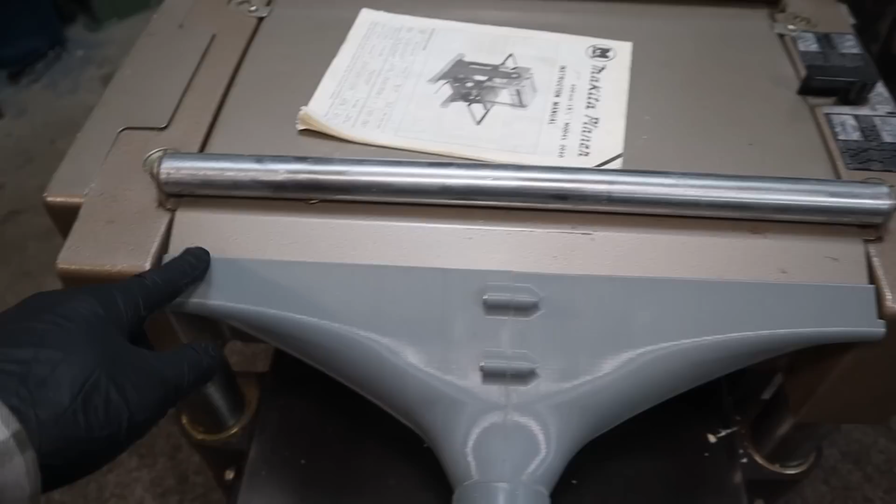So this is my planer and I really like this planer. It does not come standard with some sort of way of collecting the dust. So this would have just shot all of the sawdust all over the floor. And I guess maybe for some shops, like maybe if it's in a barn, that's okay, but definitely not for my shop. So a few years ago, I 3D scanned the back of this planer and I came up with this 3D printed dust collection system.

And it works okay. My shop vac hose just attaches to here. And the smaller shop vac hose can also attach just on the inside. So there are a few issues with this. Number one, it doesn't look very good. Doesn't look like it was professionally designed. And it doesn't look like it belongs to this machine. So I'd like to address that.

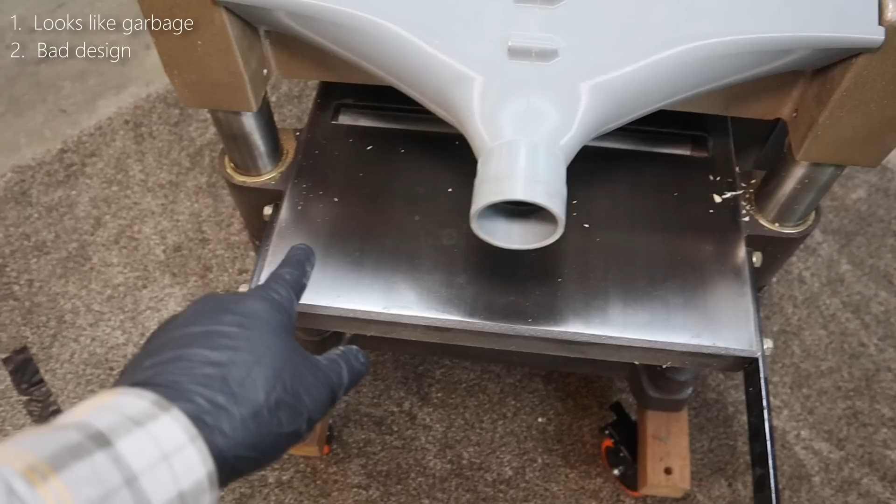Number two, this comes out the center and the hose droops down, which means I don't tend to use the center of the planer. I have to go to each side. And number three, when I plane material on each side, the collection is horrific at the sides. It just does not collect any sawdust and it all gets bunched up in here. Number four, these gaps are a little bit too large, so some sawdust spits out the side as well.

And number five, this was printed in two pieces. I would really prefer it to be printed in one if that's possible. Not really sure at this point whether that's going to be. So I thought we would use a combination of old school and new school 3D printing to come up with a brand new version. And as usual, I'll make it available to anybody that has the same planer.

First, I'd like to hook up my shop vac and run it just as is. We'll have a look right through the front and see what's happening with that sawdust inside there.

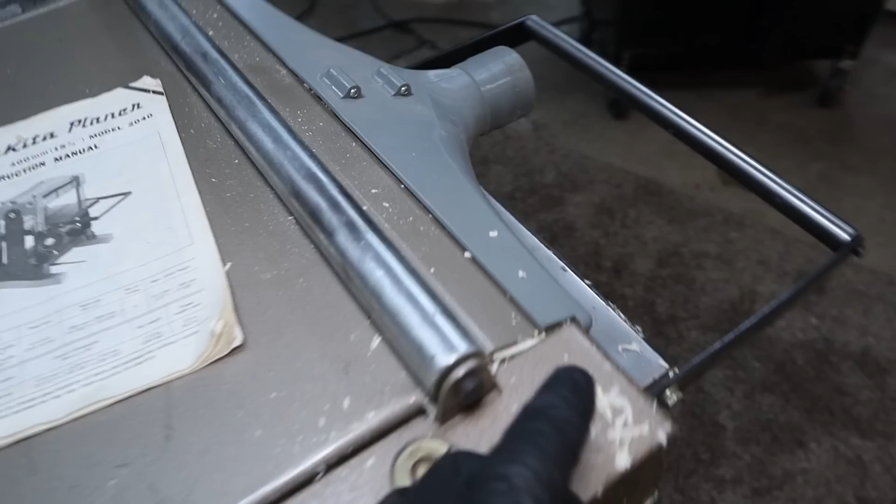So we didn't have many passes there and there's sawdust all over the place. Sawdust on the tripod, sawdust on the floor, off to the side. It was shooting out here a little bit, not too bad out of here. A little bit coming out of here, a little bit on the sides. So hopefully it's pretty obvious that I need to make some changes to this. So I'm going to get this all cleaned up. We'll get this lid off of here and have a look at how this is attached.

And this has some pretty sticky adhesive on it. I think it was the exterior grade automotive tape. So I'm not sure if the heat gun's going to work with this, but I'm going to give that a try.

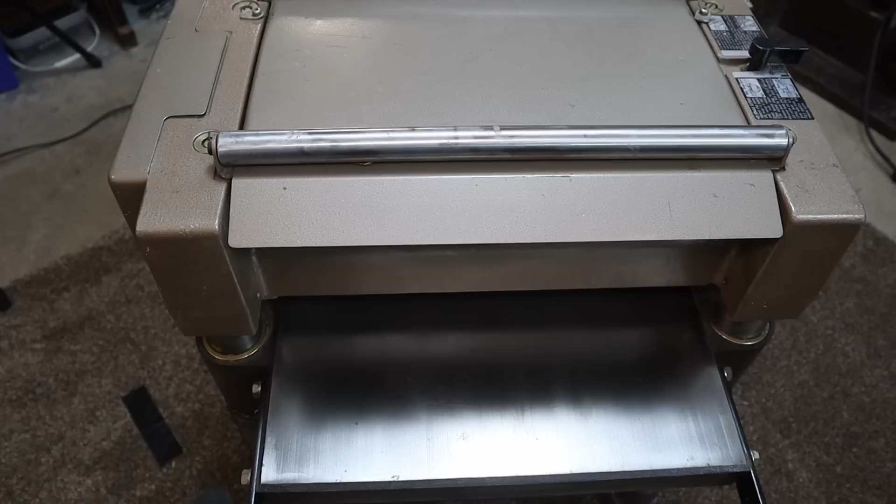So I think the best way to approach this would not be to go directly into the software using a 3D scan, but rather to go old school and create a template on here, something that we can actually use and test out and maybe even modify to see if it's all working properly. We'll shoot the camera in the front there as well with some light, make sure that it is doing exactly what we expect it to do.

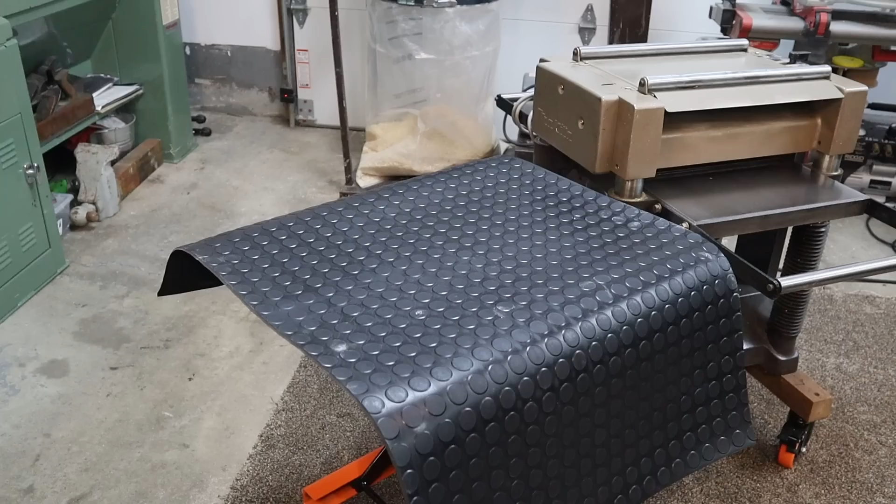So we're going to need a sharp knife, a glue gun, glue sticks, and a cardboard box.

I'm a little bit surprised with this being a popular planer from the past that there aren't any good options for dust collection. There are maybe 3 or 4 options. They are a combination of wood or maybe metal. Some are ductwork. One person even cut a hole in the top panel and put some ductwork coming right out of there. I think that is a big no-no. Hopefully by the end of this video, we'll have a much better option.

So I definitely do not want something coming off the center. Also, something coming up wouldn't work well either, because there's going to be boards on the top of here and those boards would hit that pipe. So really all that we have left to choose from is either this side or that side. And I've got the switch at this side and I've got the hand wheel already, so I think I will just have the pipe over on this side as well.

The pipe is a 5-inch, I think it's inside diameter, not 100% sure yet, I don't have it, but this is 5 3/4. It should give us a little bit of wiggle room to work with.

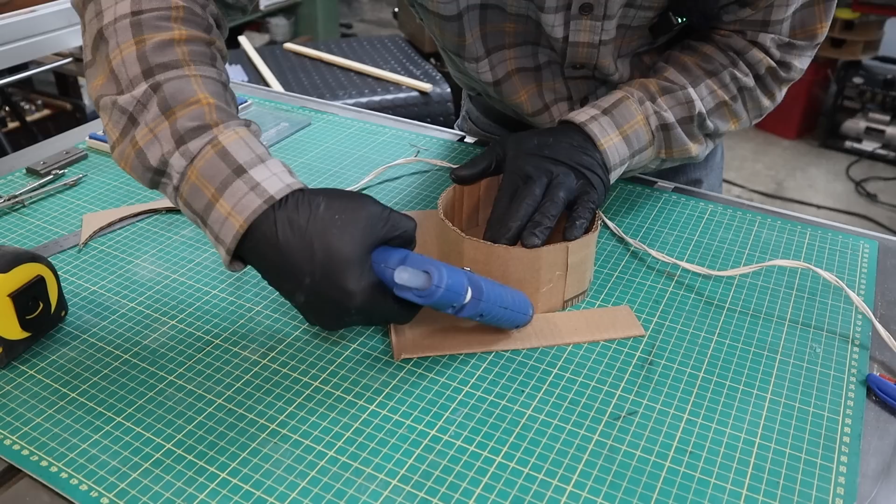It just doesn't look like this is going to work properly, so I went ahead and remade it to this version. Okay, an angle like that, but it's still not right. Remade it again, and it really kicks out further on the bottom here as well. So that's not too bad, and the corrugated pipe that I'm going to attach may end up being around the outside, so I want to be careful with that.

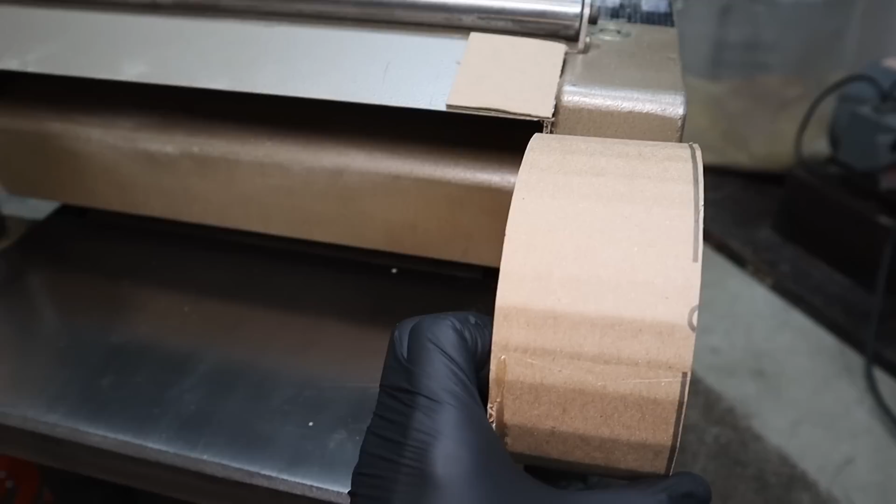So what I think I'm going to do is have the pipe off to the side like that. It will make it a bit longer, but I can break it into pieces if I need to. Now this needs to come off, so I'm going to use the heat gun for that.

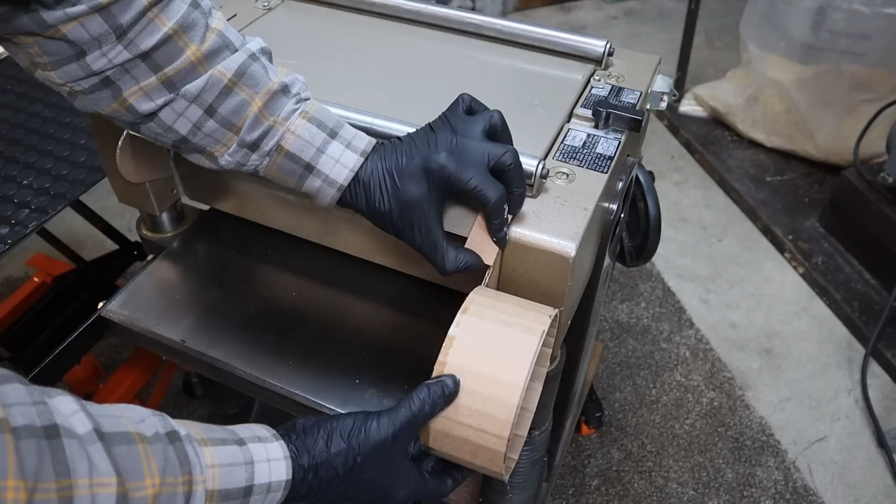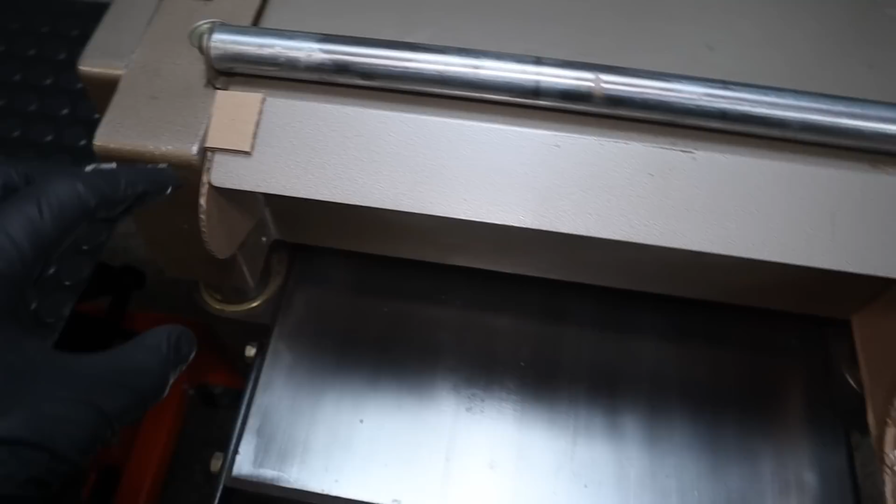I think that's starting to look really good. Now we need to fill in a piece. We need to go from this width to this width.

Got a couple problems. One is the cardboard only wants to bend in one direction. I'm changing shape at different rates and I'm changing angles at different rates, and I just don't think that having a single piece of cardboard is going to work here. If I did, I'd really need to make it much more malleable. So I'm not going to do that.

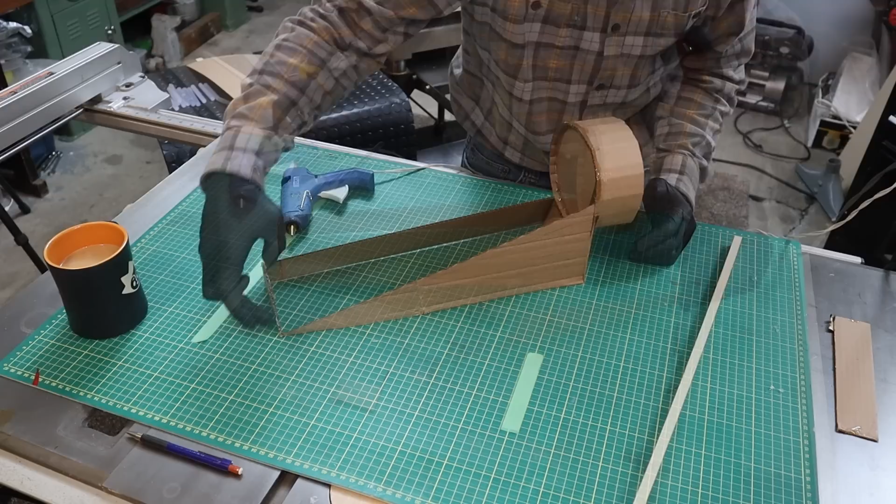Instead, what I'm going to do is anytime that it transitions to a different type of shape, like from a straight line to a curve, I'm going to make a cut. So for example, on this side, I have a curved piece, but over on this side, I have a flat. So I'm going to taper from a triangle that is this wide, where the flat section is, to nothing over on this corner.

I would say it probably took me close to a half an hour just to do the glue up. So maybe an hour overall to come up with this. And I don't know whether it's actually going to work. So let's go ahead and get this on the machine.

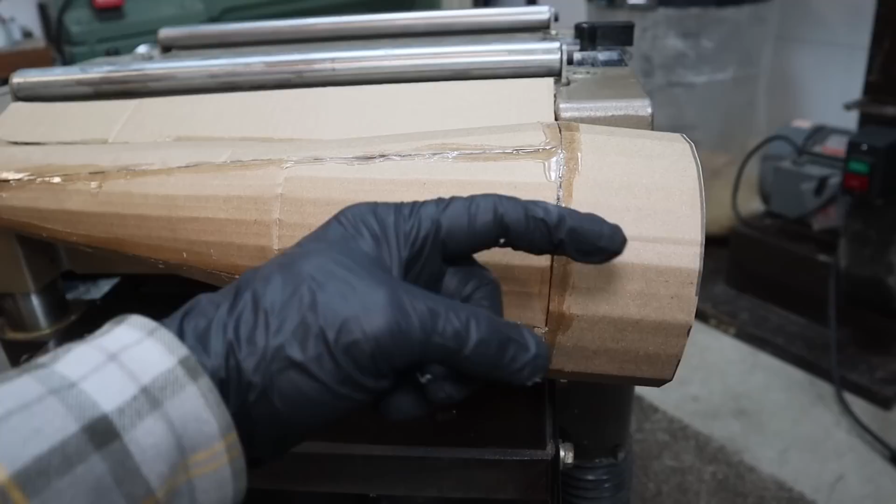Well, I have to say that looks pretty good. You can see this is at a slight angle on the downward, but I don't think that's going to be a problem. You can see there we have a bit of clearance. The pipe should attach outside of there. So even if the pipe does come down, it's not going to impede anything coming through here.

I just noticed right under here, there's a bit of a gap, and I think I'd like that to be filled in. So I'm going to use some cardboard. And this is what it looks like filled.

So the next step is to connect this to my dust collector, and this video was in jeopardy of not making it on time because I got a warning saying the delivery was delayed. Luckily, it arrived. This is the 5" by 10' clear PVC hose. This is supposed to be pretty high quality hose, and it's supposed to be able to fit a 5" outside diameter. So the ID on this should be able to stretch or fit an exact 5". That said, this is probably not going to be the exact right size, but that's okay.

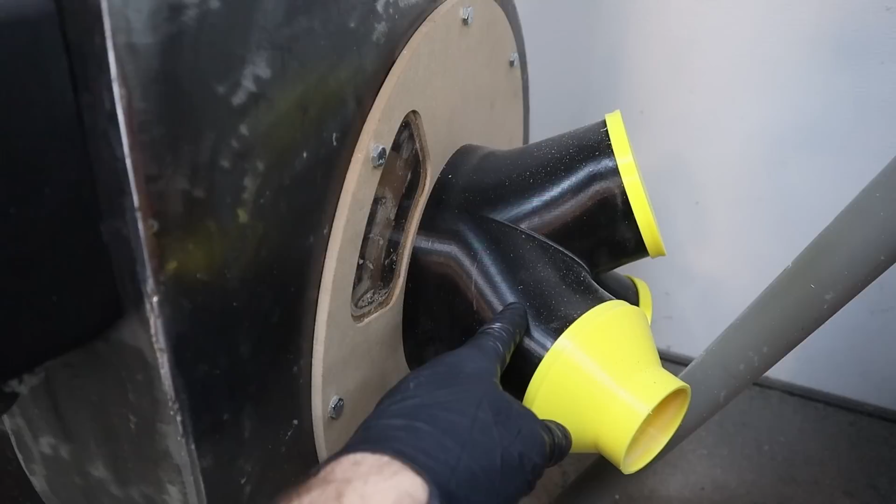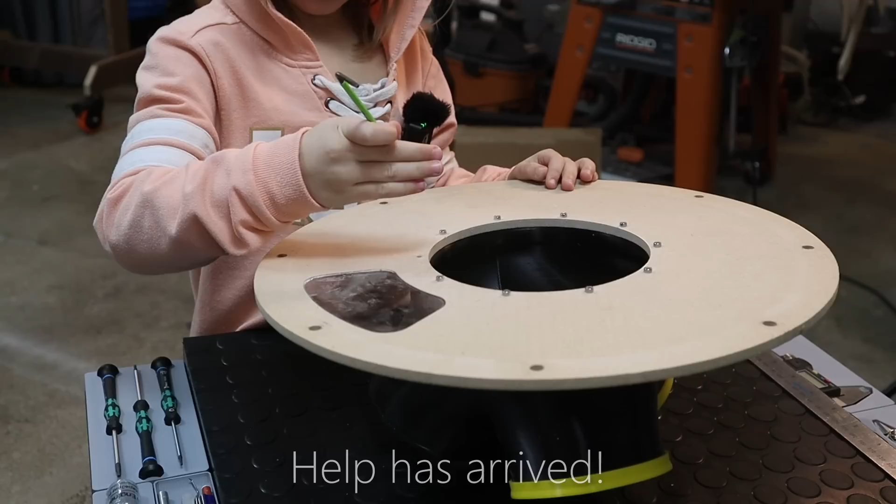Steel to steel, a little over 5". So perfect. So that means that I can remake this for the dust collector with just one piece coming out at 5", and I will have a little bit of a lip on it as well, just like I did with these ones. Here's the new one.

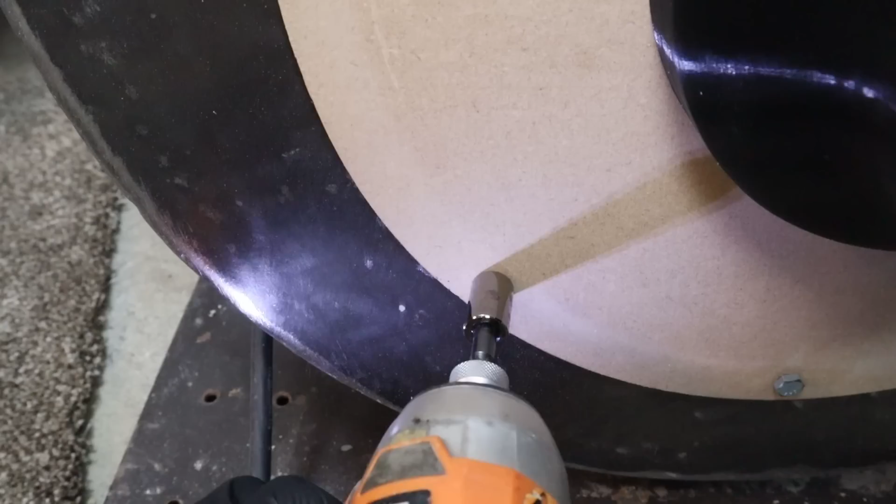So now we have the 5". Before I was using a 4", but it had the splitter on it as well. So let's just do a quick test.

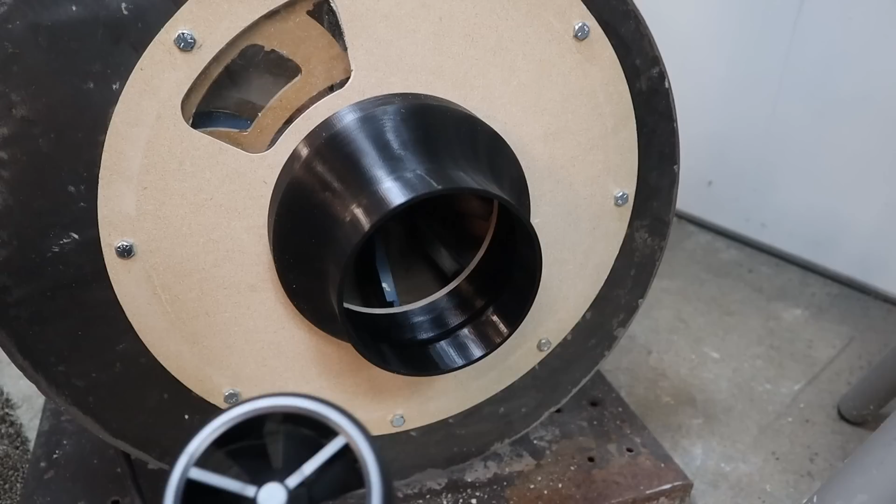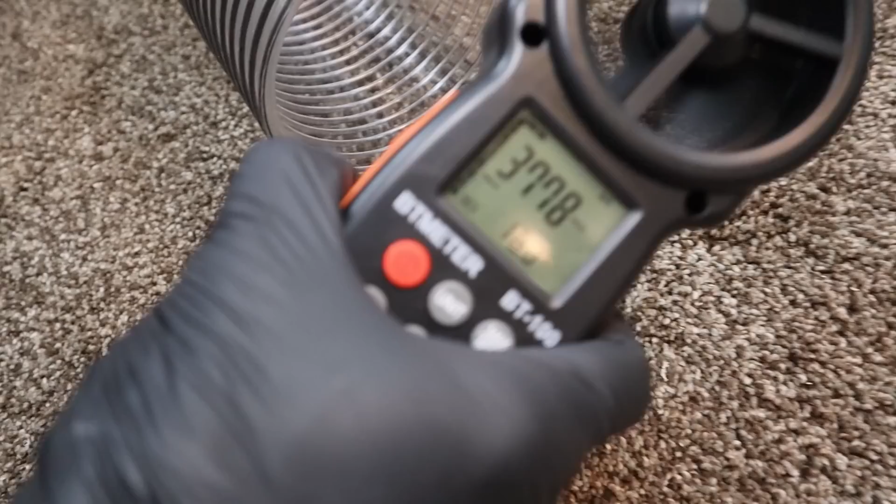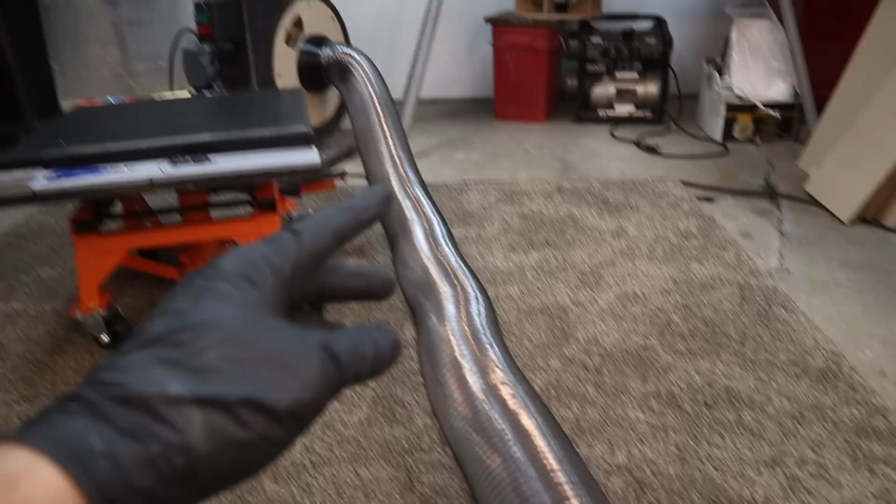So that works out to about 930 CFM, which is dramatically more than what I had before. I think I was getting a little over 400, 450 or so, which I guess makes a bit of sense because the total volume of air that this is able to move is dramatically larger than what you'd have on a 4". Eventually, I'll switch over to smooth pipe and only have a short section of corrugated hose.

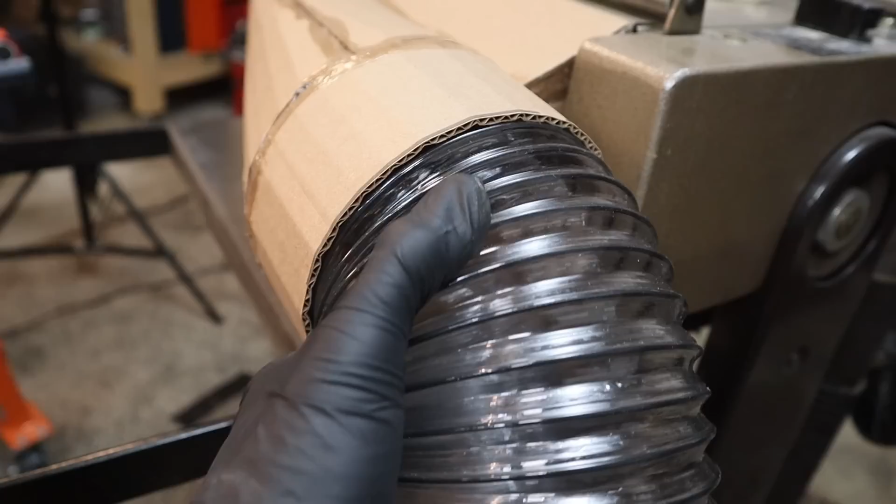This is in there nice. It is putting a little bit of downward pressure and trying to pull up on this side. So there definitely needs to be something to prevent this from lifting on this side.

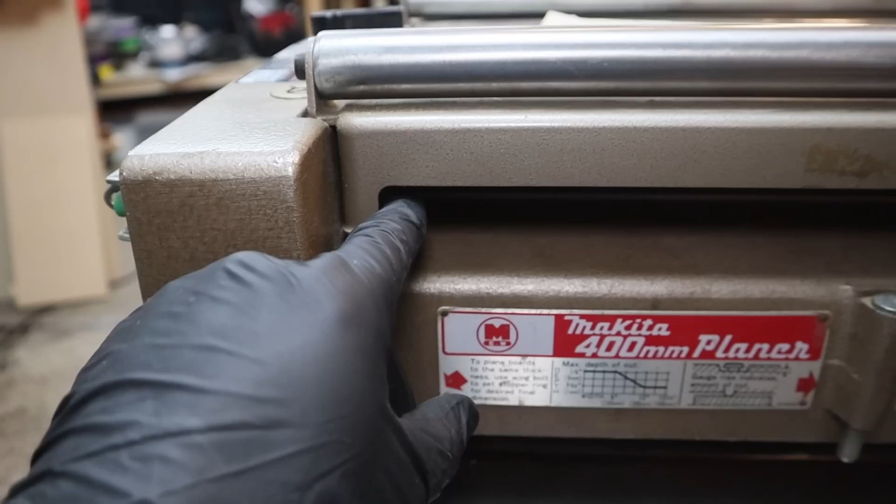So I took the glove off because I was able to feel there's quite a bit of air movement here and a little bit of air movement down here as well. There's a big cutout here, and I'm not really sure why that is exactly. It may be to allow the air to be drawn in so that the majority of the chips come out the back.

But with us having a dust collection, I think it makes more sense to close some of this off. And I've made a filler piece just out of cardboard for now. We can eventually make this out of some other material. And I think that's going to help to increase the airspeed here and also promote a little bit more draw from the bottom.

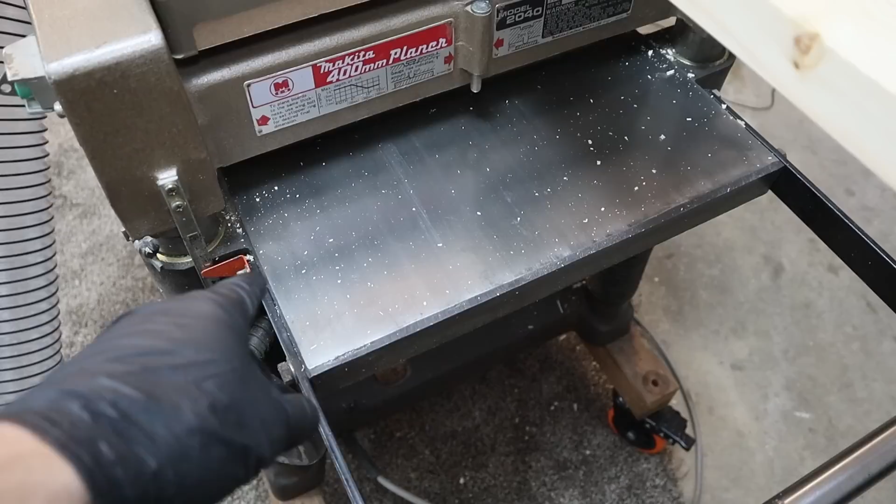One chip over out the back, one chip on the floor, on the back. Front's a bit different story. There is a little bit here, there's a little bit on the floor. What I found was that towards this side is where we had the majority of the problems. And I think there's not enough air movement over on this side. So this is where I want to make a slight little change. I'm going to close this off a little bit more as well.

I blocked this with a little bit of duct tape, and I'd like to run some parts through and see if we can see what's happening inside.

Well, that was definitely a lot better than before, and the dust collector's just eating the sawdust for breakfast. The hose size seems perfect. I don't think there's any chance that that's going to get clogged up, but I was kind of hoping for a little bit better dust collection, to be honest with you. So I think I'd like to take a different approach.

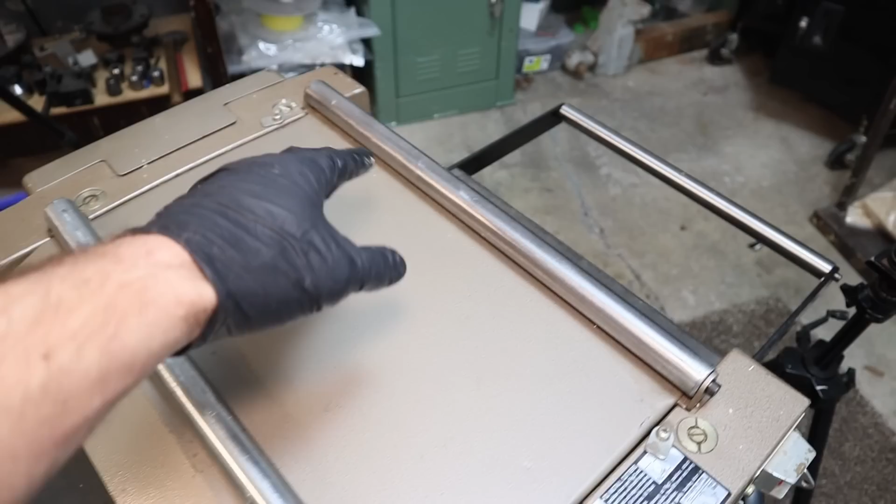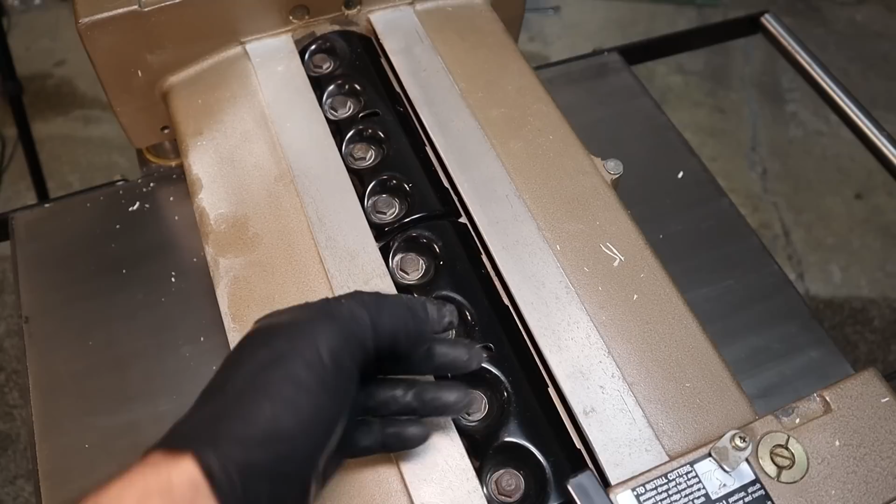I'd like to take the top of this off and see if we can do something right at the source rather than trying to capture it all at the back and trying to plug holes and increase airspeed and things like that. I think we can maybe do one better. It's strange that so much air is coming in or being pulled in from here when it really should be pulled up from here, and there's quite a gap. So I think that we can do a much better job of pulling air in from here where the cutter head is.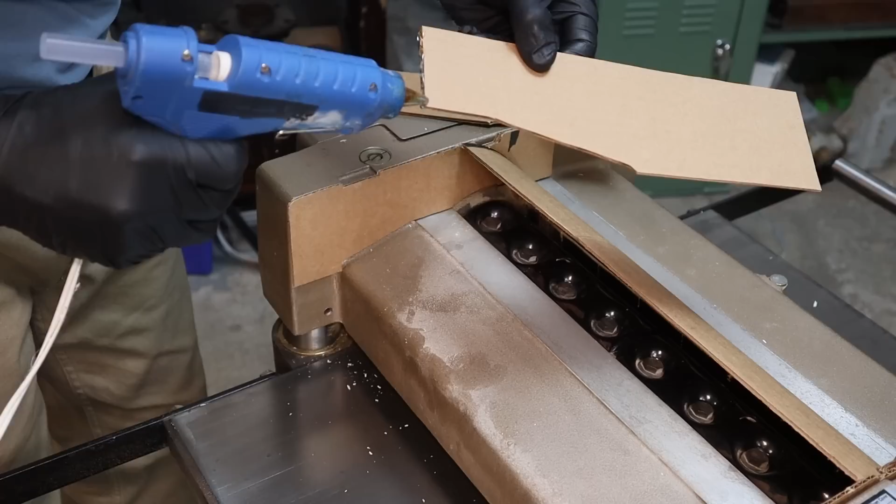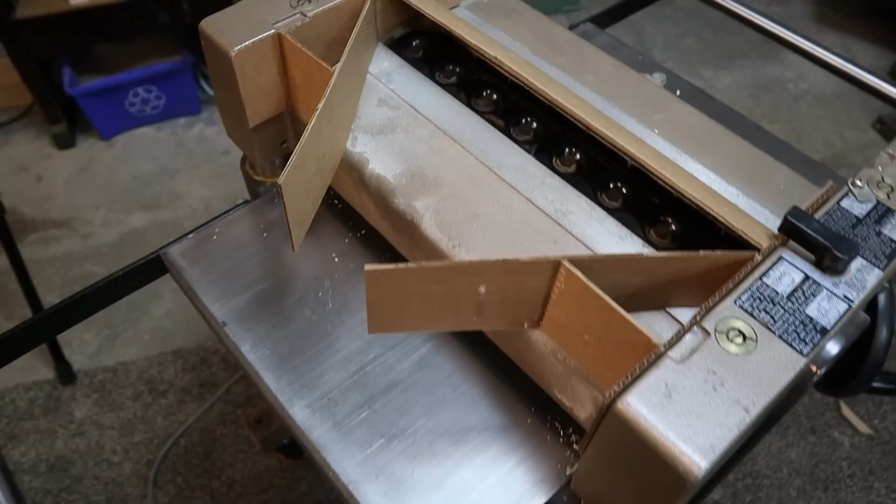I'm at a bit of a crossroads. I have to make a decision about where I want this to come off. Do I want it to come off the back, which is against what I was originally wanting to do, and have the hose dangling down, or find some way of supporting it just at the right height, or again off the side? And after thinking about it for a few minutes, actually more than a few minutes, I think I'm going to continue to come off the side.

And I didn't go too crazy with the design. I just wanted to keep simple shapes. So this is basically a cylinder attached to a bunch of pieces I just filled in. Now, this will not be able to accept the top. It has these gussets in here, and I didn't want to have to account for them because it just added some complexity. And it has this piece, a deflector on the back, and that kind of got in the way. I'm not quite sure what I want to do with that yet.

So I have a piece of MDF here that covers up that section, and I can fasten it down with the original screws. And this time, rather than the larger cylinder, I've gone with a little bit smaller one, and instead the hose will fit over top of it like you'd typically see.

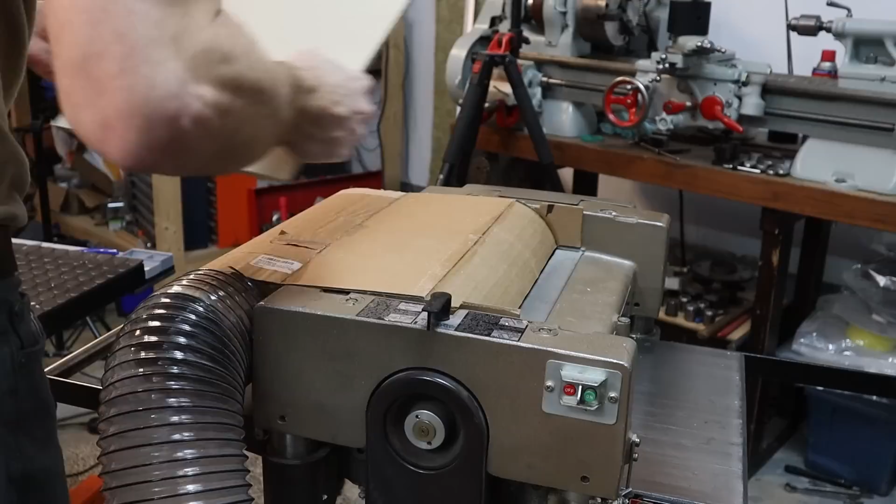So I'm pretty confident that this one is going to work better, but let's go ahead and set that one back up first, and I'm going to run some pieces through on this side right here where it was having the most trouble, and then we'll set this one up and do the same.

So only a few passes and we have sawdust here, and a bit on the floor as well. So hopefully with the change it does improve this. So let's take a look.

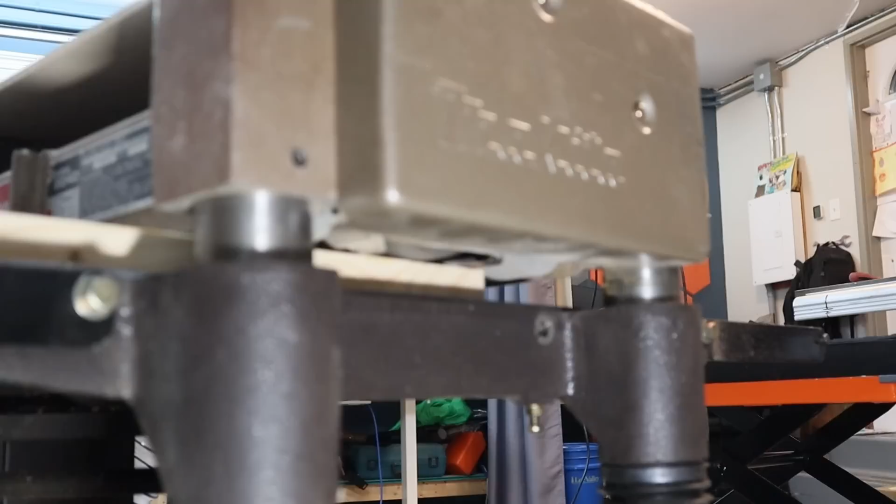Well, it's not perfect, but it is quite a bit better than what I had before. And I was running right at the very edge. I ran a few just right here.

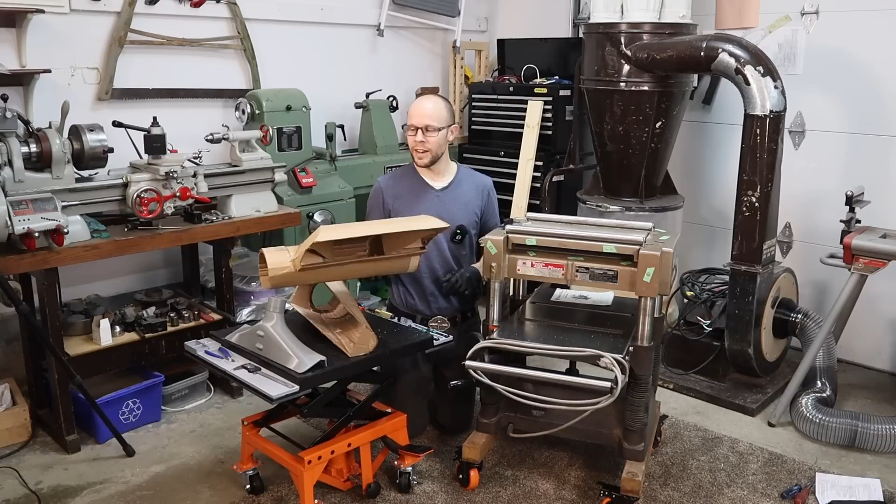Now I probably could leave this as it is and paint it or even fiberglass with epoxy, and this would last me a long time, but I would like to level this up, and I'd also like to make something available for any of you who have the same planer and have the same problem as well. So let me show you what I've done.

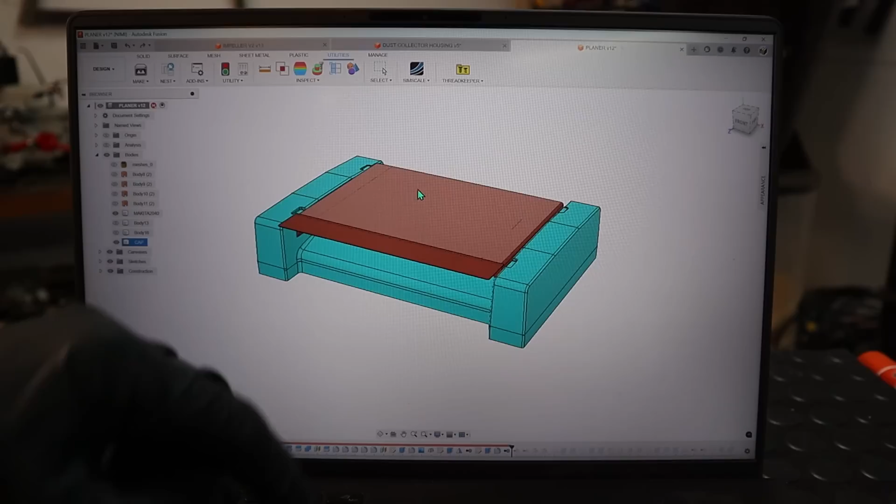Inside Fusion 360, I've created a very basic model from a 3D scan, and I've also created the top cap as well, just to make sure that I have the right clearances so that this thing does fit in properly, because this is going to be pretty big and I don't want to have any issues. From there, I've created this shape, which is exactly what we did with the cardboard version, but it has a little bit more gradual curve inside of there. It's going to help to funnel some of that sawdust out and into the dust collector.

I was able to find the exact font and create the Makita logo on the back there as well, which I think looks pretty cool. But we're running into a problem here. This thing is just massive, and I'm going to need to split it into several parts.

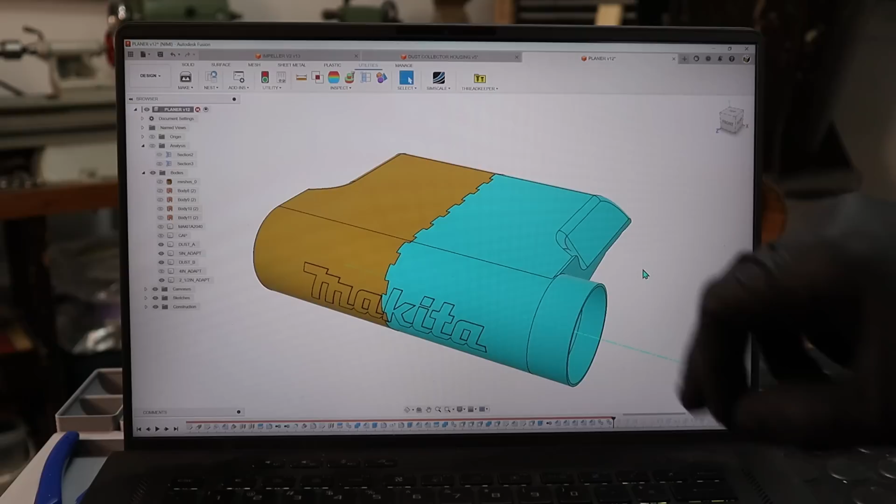So what I've done now is separate it into 3 pieces, and the cool thing about this is that I have different sizes available. So if anybody wants to download this and try and print it themselves, they can download the adapter size that works for their dust collection system. I have the 5-inch, I have a 4-inch, and I also have a 2.5-inch shop vac adapter.

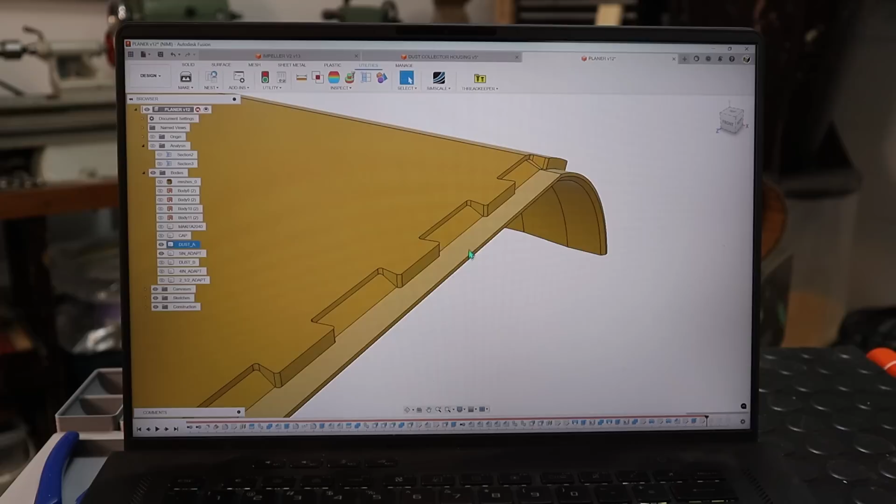So the really difficult thing about this design is how do we connect these 2 pieces together and have it be a very strong connection, but without impeding the airflow on the inside. I have a combination of a dovetail and a scarf joint, and I also have a lap joint in one. So this is intended on being a glued connection, but it should come together and actually be pretty strong without glue as well.

The dovetails are also slightly tapered. As it gets closer to the final meshing point, it gets a little bit tighter and tighter. And to make sure there aren't any issues with this coming together, I've allowed a little bit of clearance in here as well. And the adapters connect to the main body of the dust collector with a slight taper also.

This is going to be a pretty large print, so I've printed these samples to make sure it's all going to fit together properly. This is just in matte PLA, printed on the Qidi Plus 4. And when I brought this together, you can see it's a little bit too sloppy. This is a 0.4 millimeter gap, and it's just a little bit too much.

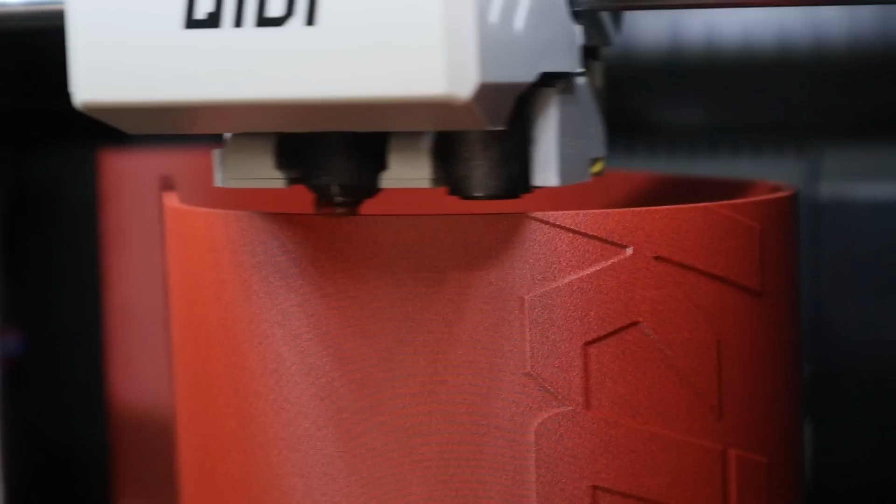So I've gone ahead and reprinted this with a 0.1 millimeter gap, and that ends up giving us this. So the last change was to shrink it down to 0.08 millimeters for the gap, and that should give us a much tighter connection. And that leads us to this.

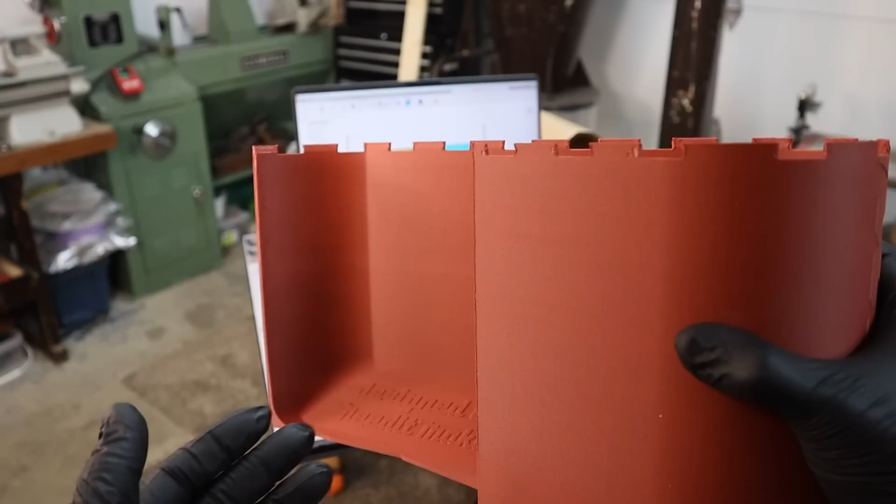This is printed in PETG carbon fiber. There's a couple imperfections in here, but that's going to happen because this print is nearly 100% solid, and it's very difficult to prevent this from warping. I would say the PETG carbon fiber overall did well, but it didn't do as well up in this dovetail area. You can see some imperfections there.

This is the adapter, and this fits on just like so. It is an absolutely perfect fit. I don't actually think I need glue, so all I have left to do is print the mating part and see how this comes together.

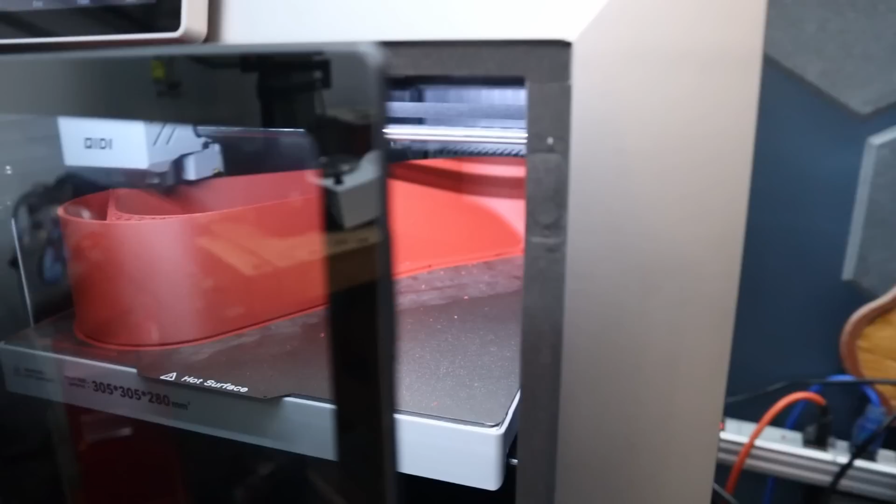We are closing in on halfway through the print. It's been about 6 hours. I won't open the door too much. I don't want to release too much heat. So let's come back when it's finished. Ooh, that came off nice.

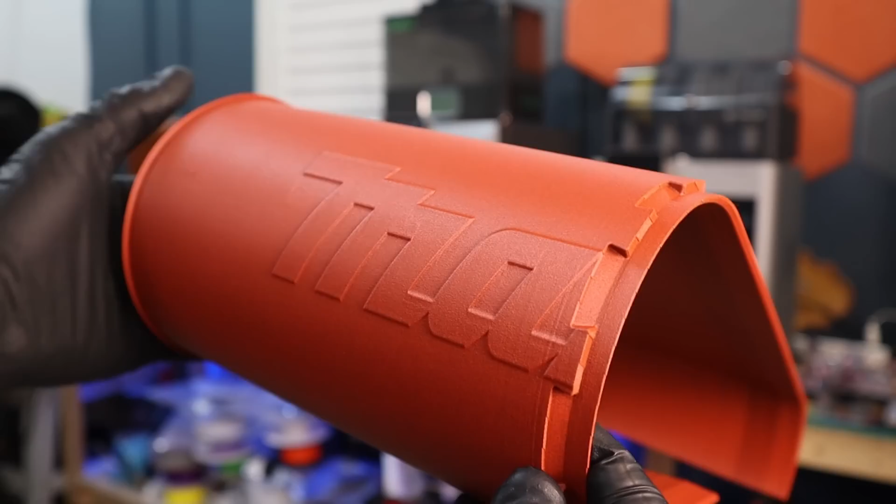I probably should have just closed the door. These are such big prints that would have helped to keep the heat inside that chamber and probably prevent a little bit of that warpage. And the zipper type of connection here. Don't know what we should name this. I guess we should wait probably until we find out whether it actually works.

And this is what it looks like on the inside. You can see a very gradual curve, smooth transition. That should help to guide the sawdust in. And on this side, it was a little bit different. We have that somewhat gradual transition here, but where it met the cutout for the circle, this is the resulting shape. So pretty unique kind of a cutout shape. So really all we have left to do is get this together.

This is the exact same font, by the way, as the Makita logo. If you're interested in that font, I will put a link down there below and credit the person who went to the trouble of doing it.

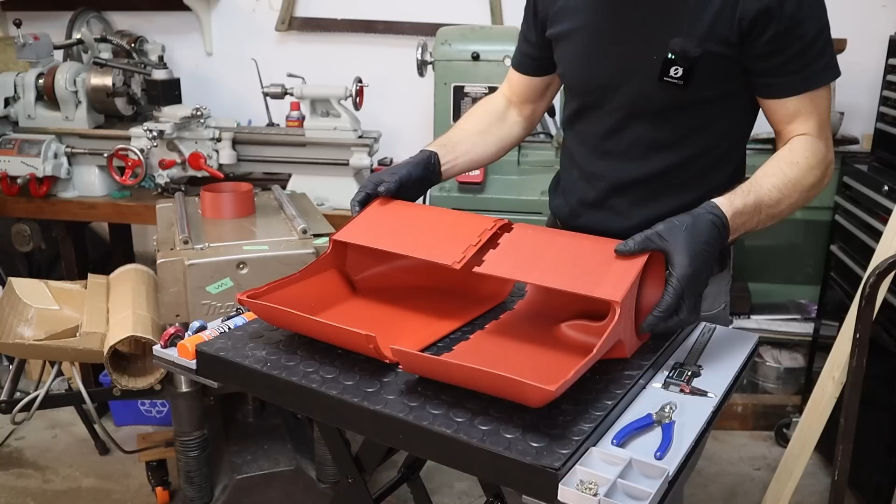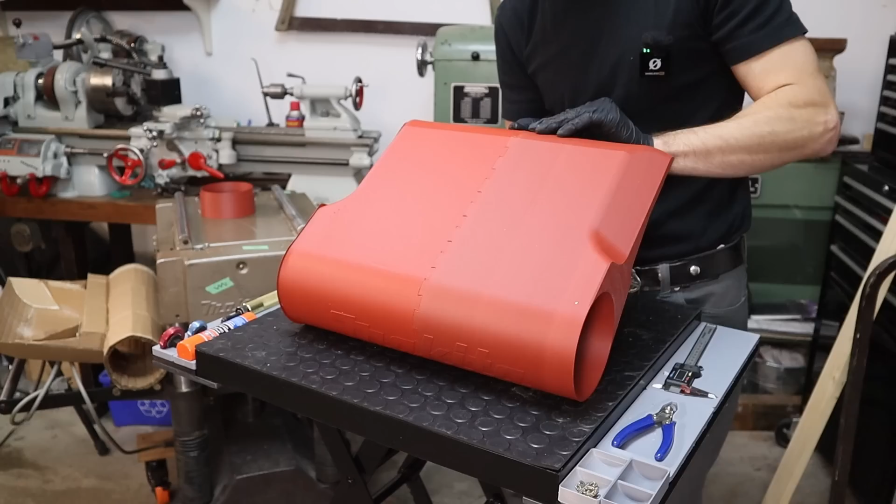Of course, there is that ring as well. Turned out really nice. So I think I will start at the bottom. That went together a lot easier than I was expecting. The adapter ring. And what do you think about that Makita logo? Look at that. Very close to the same shape.

Now, if you were paying close attention to what this originally looked like, you'd know that I modified this little flap at the back. And normally I would not modify a machine. I do everything I can to avoid that. But it was cutting off some of the airflow and really complicating the design. So I just put it in the vise and I bent it up. It looks really good.

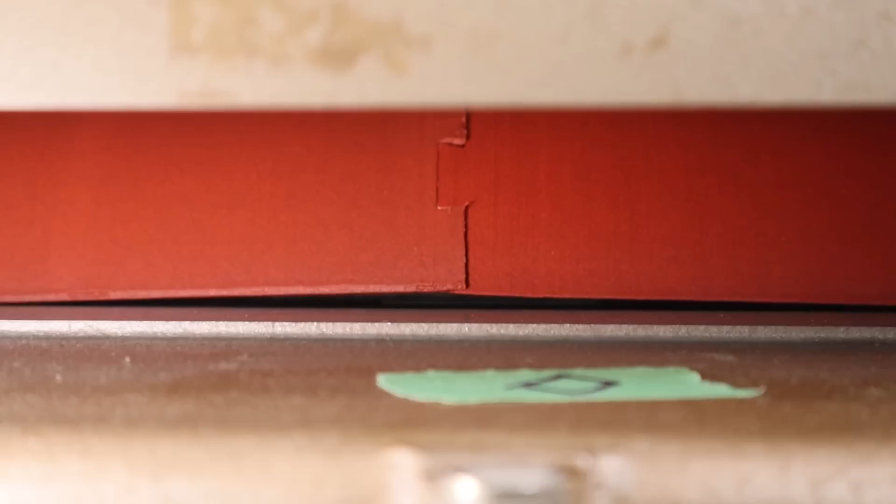You can see where that warpage comes into play. About 1/8 of an inch or 3 millimeters in the center there. It's definitely more than I was expecting. So this fits really good, and it's being held down there quite a bit better than I was expecting.

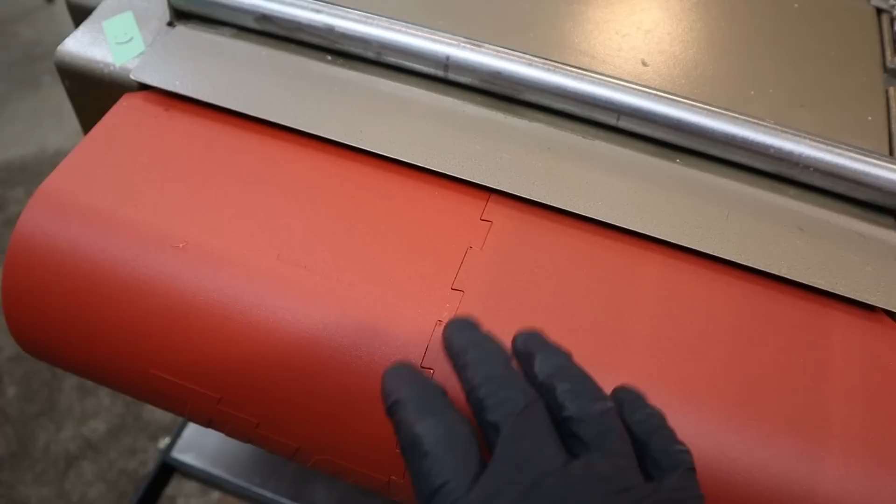I was going to glue this in, but I don't think I even need to glue this. It just isn't going to come apart. And this is really going to be in here all the time. I'm never going to take it out unless I'm trying to maybe clean it or something like that. So let's go ahead, we'll glue this in with some super glue and make sure that doesn't come out.

And again, I have a 4-inch, I have a 5-inch, and a 2.5-inch adapter option as well. And I'll also make one more file available, and that will be just the flange, and that means that anybody can take this and adapt it to whatever size they need to.

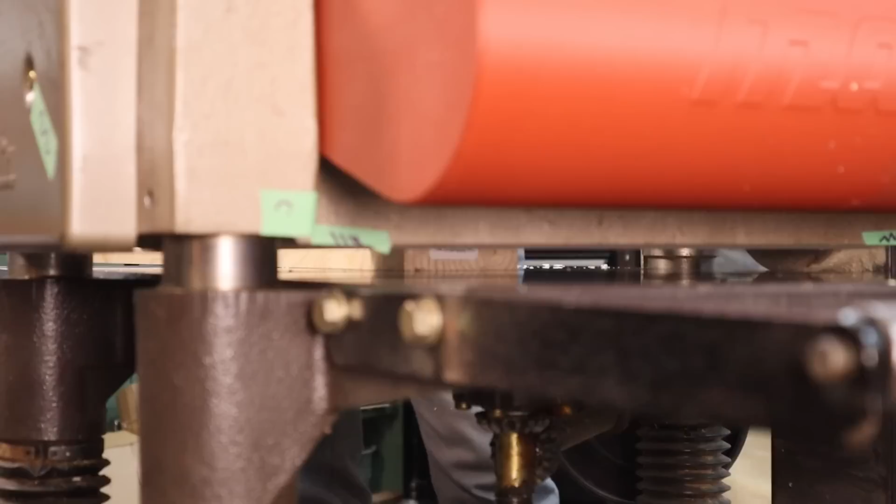I probably ran it through about 15 times and this is the result. Very small chips that are ejected out the front. Almost nothing on the floor in front, nothing that's big anyway. There's a little bit falling down here, not much on that side. Overall, a really good improvement over what we had before.

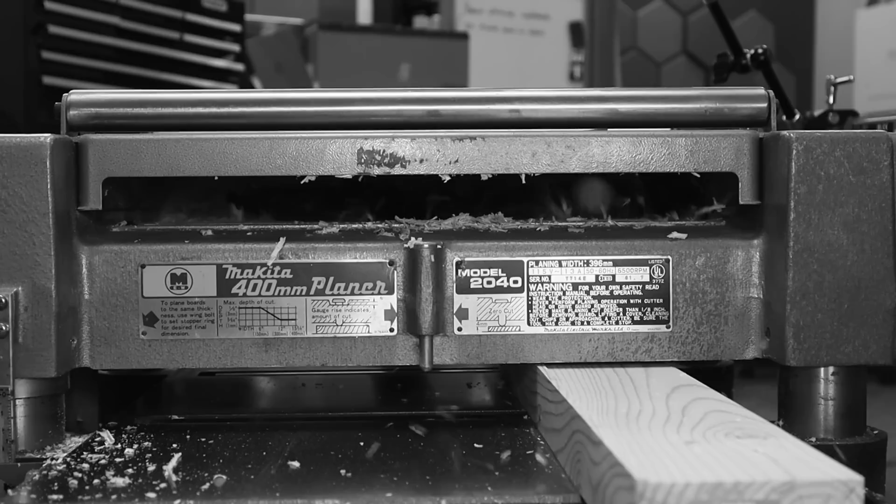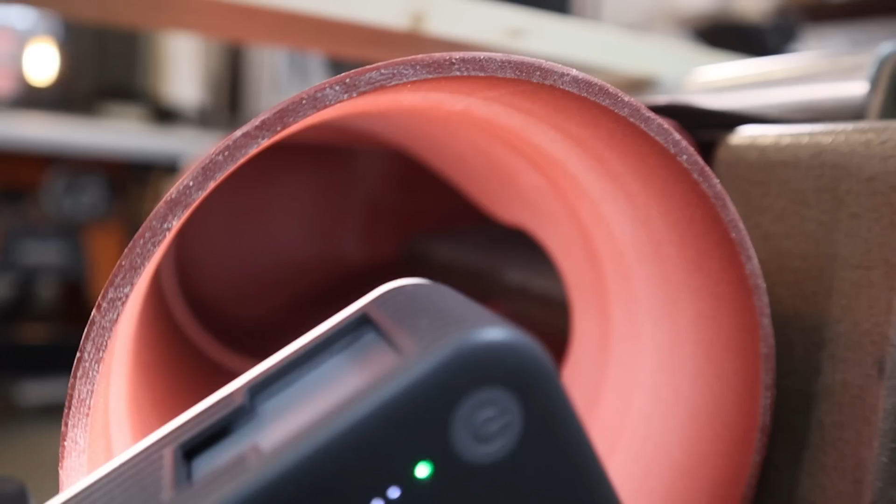Let's take a look to see what kind of sawdust buildup we have. Pretty much nothing. There's a little bit on the super glue. It might have still been wet super glue, but overall, wow, that is clean. Definitely a little bit of static going on. And a little bit of sawdust built up here. And a little bit of sawdust residue at the bottom as well.

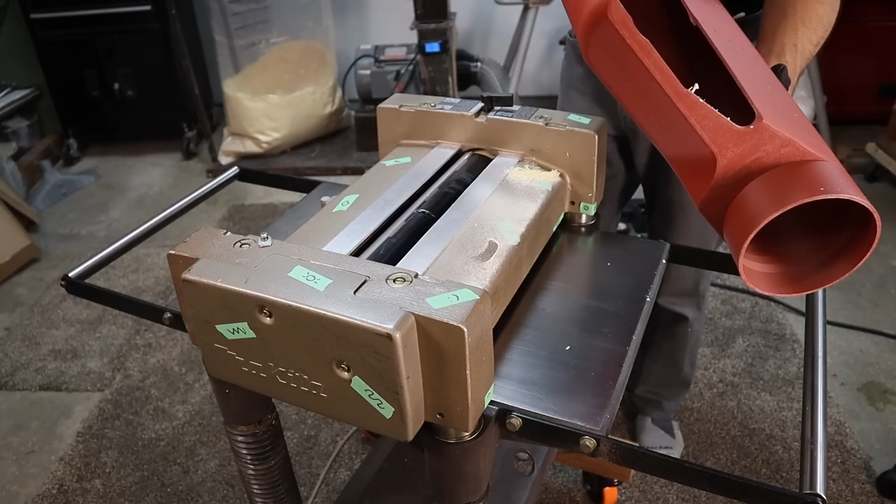Interesting. So I wonder whether the PETG is giving a little bit of a static charge. I noticed the chips in the dust collector are also sticking to the side of the bag. Not sure how to avoid that other than to pick a different material. I have already modified the 3D model for this side to remove this big protrusion. I think that was the reason we were getting some sawdust built up in this corner.

And it is possible to break this up into more pieces. Maybe the deflector section could be made in 2 pieces and then 3 at the back. But I had the Qidi Plus 4 and it was big enough to do it in just the 3 pieces. So all I have left to do now is do my table saw, my jointer, my compound miter saw, my lathe, my bandsaw, and my CNC.